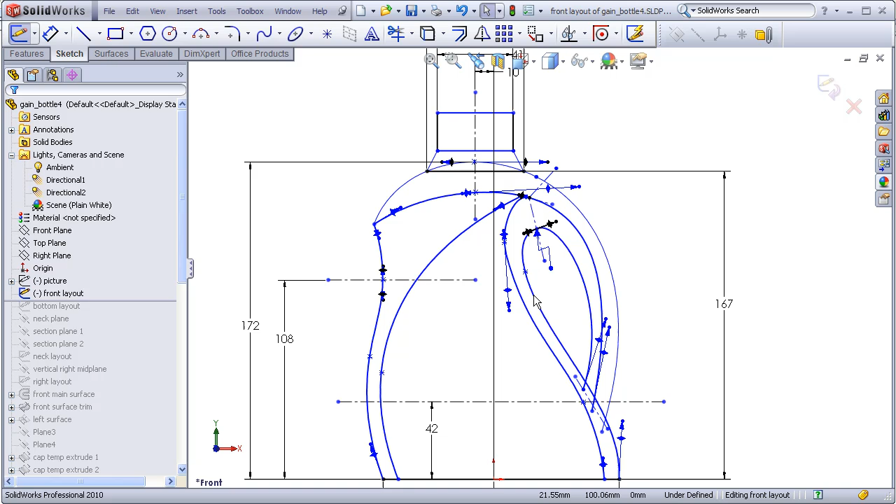We notice here where the right-hand surface arc curves into the handle underside, we have a spline which is actually crossing over itself in this area. SolidWorks does not allow splines to cross over themselves, so this is actually drawn as two splines. One here and one here, which meet at this dividing line.

This dividing line will be used to divide the right-hand surface from the handle undersurface and also control a plane for drawing cross-sectional sketches for building this boundary and this boundary. A similar dividing line divides the top cap area from the handle upper surface. Here we see the dividing line, which will also be used to control a plane.

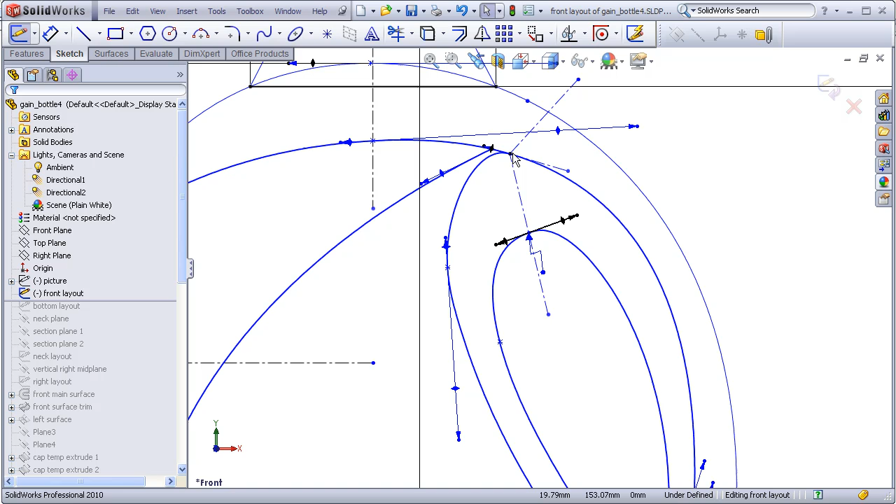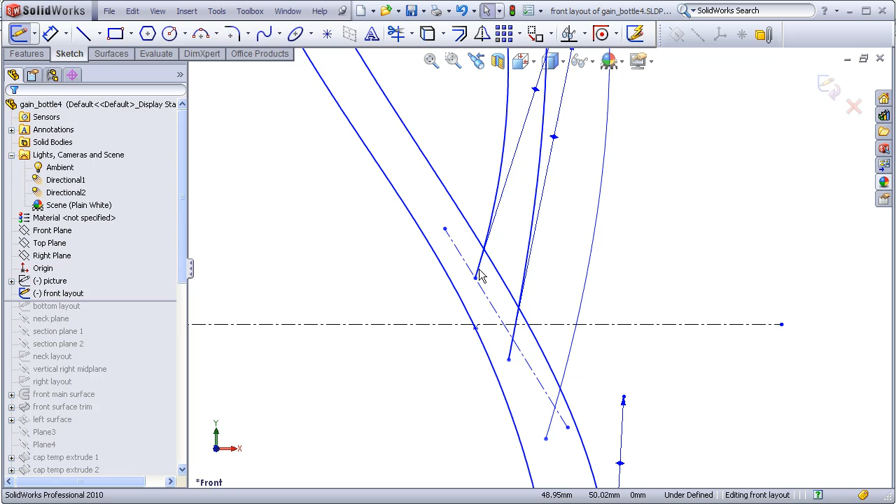Going down to the bottom area of the handle, we see that these arcs are intentionally crossing over the right-hand surface curve so that when we build the handle surfaces, it will intentionally intersect with the right surface, and we will then later on trim this excess away. Now we'll take a look at this difficult intersection area.

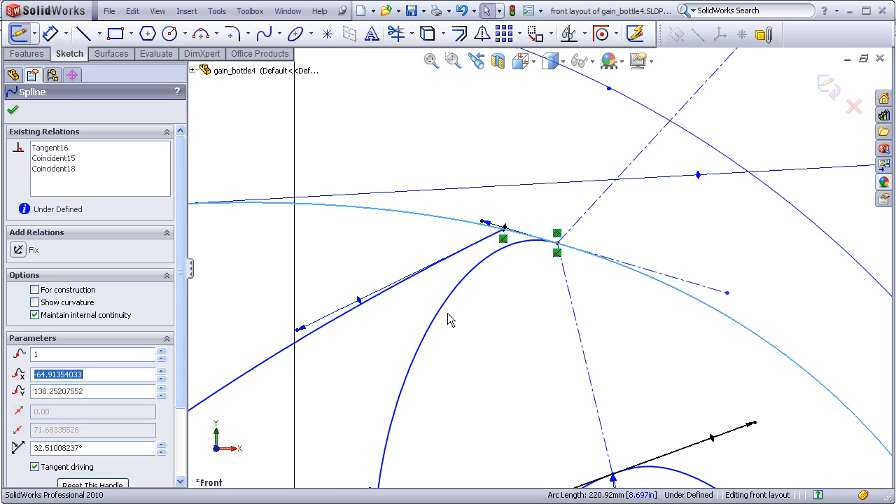This is a single arc, which is the lower edge of the cap, blends down to be the center edge of the handle, and meeting up to that is this edge which divides the front surface from the right surface. They meet right at this point. We also have this edge which divides the left surface from the front surface, and I've purposely not made them come together at the same point.

I've also drawn this arc so that it goes tangent to this spline. In order to do that, because this spline is continuous all the way through, I had to draw a separate line meeting at this point, made the line tangent to the arc, and then finally made this spline tangent to the line.

The reason I wanted this tangent in this area is so that when this surface is filled in, I have a nice smooth arc through here that will be created when the boundary surface is built, starting at this edge and moving onward in this direction.

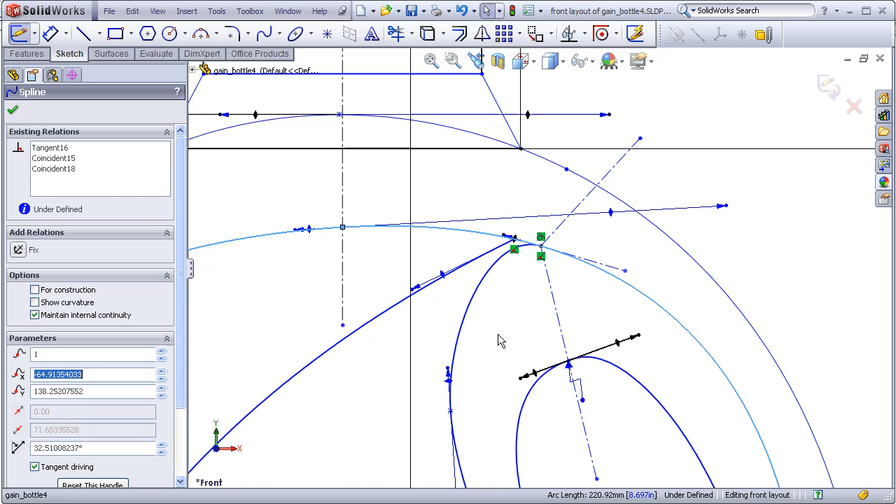This is a lot of splines meeting together and influencing each other, so if you're having trouble adjusting your splines without messing up the other ones, temporarily fix the splines that you are not adjusting and only leave the spline that you are adjusting unfixed. Then when you're happy with everything, you can unfix the splines that you temporarily fixed. You might notice some errors temporarily when you're doing this, but don't worry about it because you'll be unfixing the splines later.

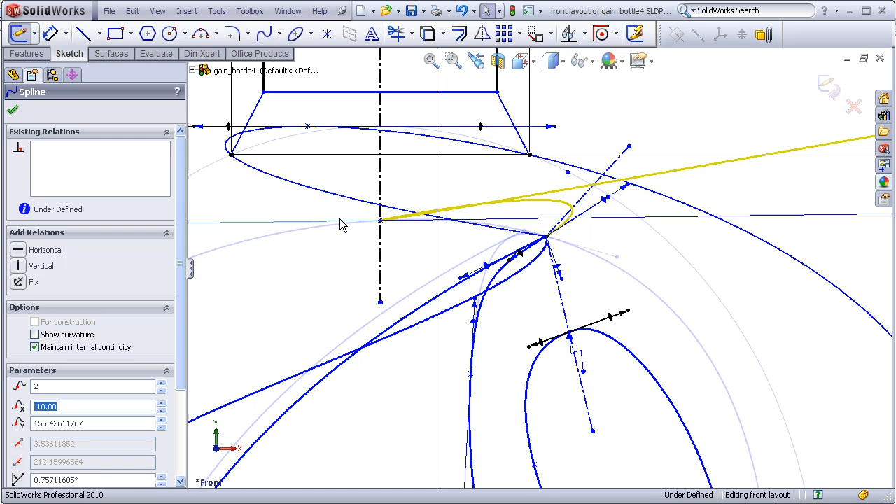To give an example, if I move this spline around, or say this spline around, you notice that a lot of things are going out of whack. So if I temporarily fix this one and this one, when I want to adjust this one, chances are things will stay more stable.

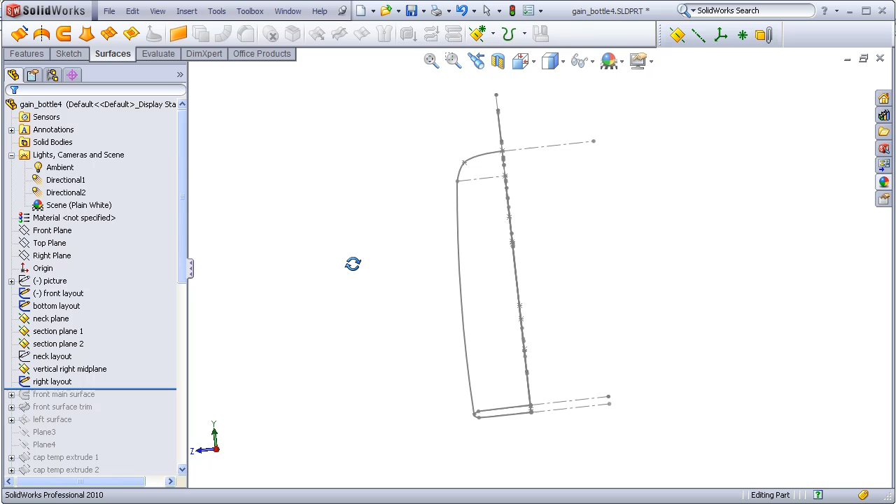The rest of the layouts are fairly straightforward. I have a layout on a right-hand plane that passes through the center of the screw top cap and has some relations going back to the front layout. As you can see, this line piercing to this arc here, and this line piercing to this point here.

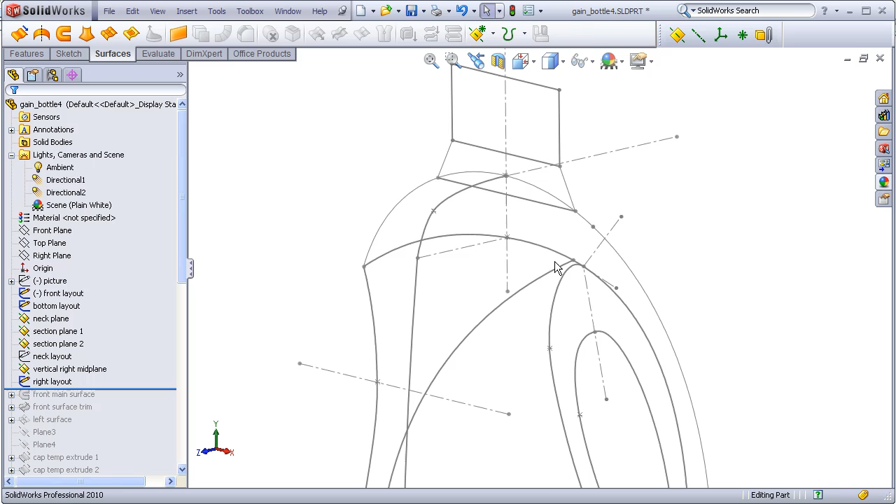The front surface is nothing but a sweep using this curve and this curve. These curves are intentionally stretched out a little bit beyond their original limits in order to overbuild the surface so that it will trim back neatly.

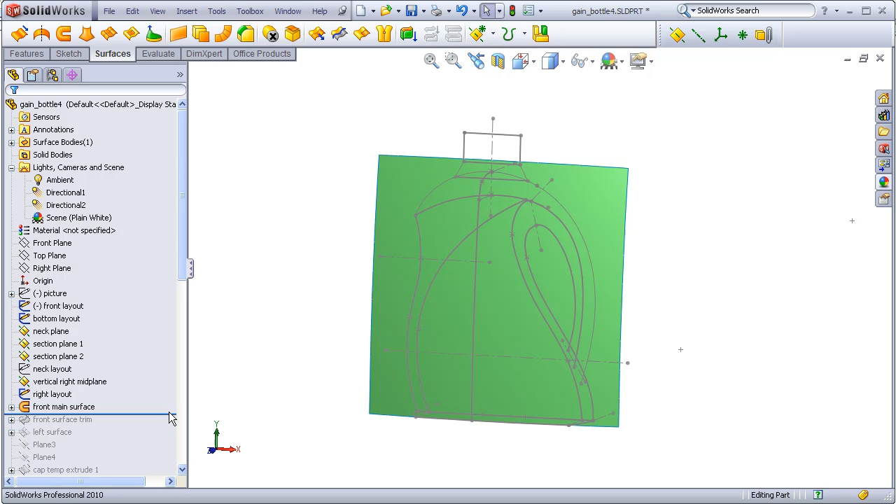The left-hand surface is simply a boundary surface which copies a curve from the front layout and a curve from the bottom layout and is attached to this edge of the front surface. To keep it under control, I had to add an extra cross-sectional curve here and cross-sectional curve here, otherwise it had a strange bulge occurring in this area. This upper edge is a projected sketch which we'll discuss in the next video.